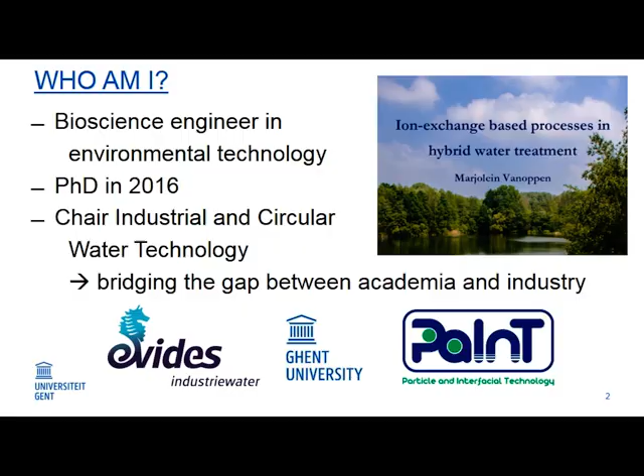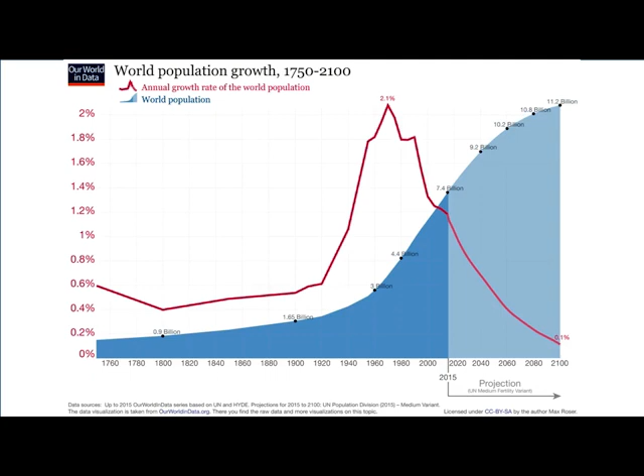The thing is, with increasing populations, we will need a lot more water. By 2050, the world population will have increased to, this is a projection of course, around 9 billion people. Fortunately, the incredible growth rate has dropped quite a bit by then, but still this is a lot of people to provide drinking water for and also to provide food for. Because this means that by then we'll need 70% more food.

Now this might seem a bit weird because it's not 70% more people, but all of these people want to live to the standard that we live in. We in the Western world have a very high living standard that has not been attained yet in developing countries in Africa, Asia, Latin America, and so on. But all of these people's living standards are increasing, and that's of course a good thing, but it also means that they will need more food, and we will need more water to produce all that food.

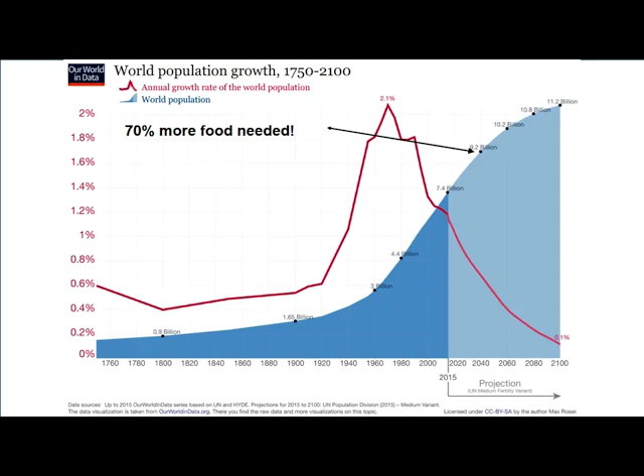Now, why do we need so much water for all that food? Well, 70% of all the water that we use goes to agriculture, goes to growing crops and raising cattle and so on to provide for our food. Funny thing is, for all of this, we need fresh water. You can't use salt water.

But only 2.5% of all the water on our planet is fresh water. And of that 2.5%, only 0.5% is readily available for use. All of the rest is frozen at the poles, for example. So all of the water that we use has to come from this meager 0.5%. Or we can look at the 97 other percent, which is seawater.

The vast amount of water contained in our oceans, our seas, is a very interesting source for drinking water in the future. Now, a lot of countries have already started using seawater as a source for drinking water. In the Middle East, for example, where they are not as fortunate as us to have vast reserves of groundwater or river water for freshwater supply, they've been desalinating seawater for many, many decades.

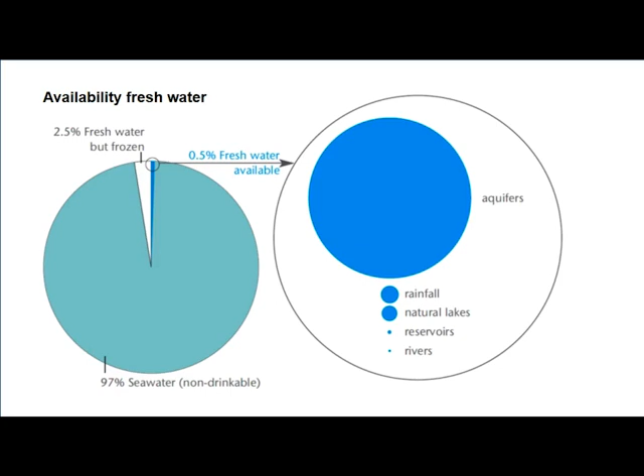So for seawater, we'll need reverse osmosis, which is the strictest membrane technology that we have at the moment. Reverse osmosis will retain more than 99% of all salts that are present in your water, and will only allow the water to pass. That's very nice, of course, but it comes with a great downside. Reverse osmosis, as the name says in itself, is the reverse process of a natural occurring process.

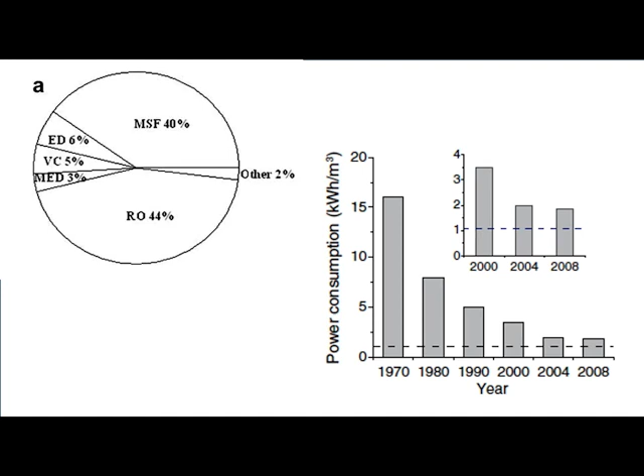The last figure is just to show that there are also other processes used to produce drinking water from seawater, but they are more and more getting replaced with reverse osmosis because these all ask for a lot more energy, factor 2 to 5 more than reverse osmosis. So this number has increased a lot over the last few years and is still increasing.

To tackle the issue of this energy limit, we started thinking, how can we go below this 1.1? And the reason we want to do that is to make this technology available for countries where it's needed, but that don't have the resources to invest this much energy in seawater desalination. Countries like the Middle East that I was talking about have no issue with this. They don't have groundwater, but they do have plenty of oil, so energy is not a problem. Other countries, such as African countries, India, they do need this, and seawater desalination would help them a lot in their freshwater provision, but they don't have the energy that's needed for this.

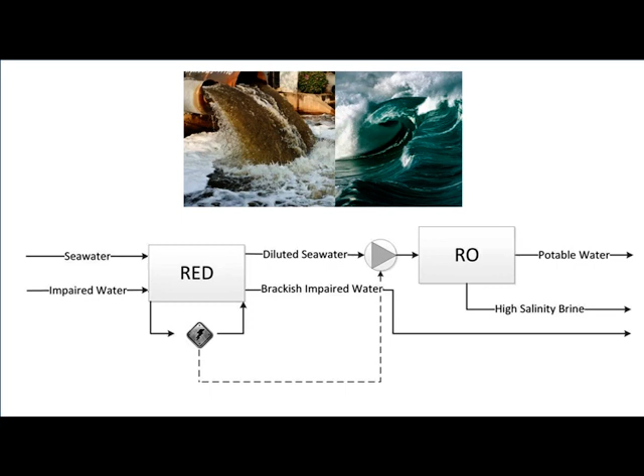So, as the title of my PhD already said, we looked at hybrid processes. And there is a very interesting technology that's been developed in the Netherlands a few years back that's called reverse electrodialysis. I'll explain in a bit what that technology does, but in a nutshell, reverse electrodialysis is capable of producing energy from seawater. By contacting seawater with a freshwater source through a different type of membrane, you can use this difference in salinity, or this difference in osmotic pressure, to produce energy. Now if you couple that with reverse osmosis, you can get a system that's much more energy efficient, and that's the system I want to talk to you about today.

Shortly on how reverse electrodialysis works. As I said, they work also with membranes, but a different type. In reverse osmosis and the other membrane processes I showed you before, water is the preferred solute to pass through the membrane. These types of membranes work the other way around. They don't allow water to pass, they allow ions to pass. They are very dense membranes, but they have a very high charge, which means they attract ions and allow them to pass through to the other side of the membrane. You have two types, of course. You have negative and positive ions, so you also have anion exchange membranes and cation exchange membranes.

Now the interesting thing here is if you have seawater, and you have, for example, river water, but any freshwater source will do, and you contact those with these membranes, the same equilibrium that nature strives to will occur here, and the ions will move from the seawater to the low salinity side on their own. That's a natural process. This means if you have a lot of these, usually a few hundreds of these cell pairs as we call them, all of the negative ions will move to one side and all of the positive ions to the other side, creating a potential difference because you have a negative potential on one side, positive potential on the other.

Through reduction oxidation processes at electrodes that you place on both ends of these membranes, you can transform that ion flow to an electron flow. That is then basically electricity. And that is in a nutshell how you can produce energy from seawater.

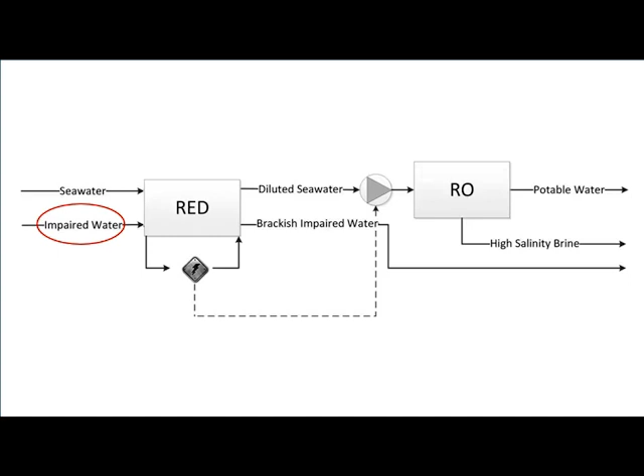So again, now I hope you understand a bit more why we want to combine these two. It has a lot of advantages. If we use impaired water, as we call it, which in theory could be wastewater without any treatment, but we're currently looking at the effluent of the wastewater treatment plant, with the seawater in reverse electrodialysis, you'll produce energy. That energy you can use in your reverse osmosis process to produce then the potable water.

But an even bigger advantage is that here, part of the salt from your seawater will already have transported to the wastewater, decreasing the salinity of your seawater and decreasing its osmotic pressure, thus decreasing the energy that's needed to desalinate it in the reverse osmosis process. So combining these two technologies has a double advantage. You produce the sustainable energy needed for the desalination, and you decrease the energy that's needed for the RO process itself.

Another advantage that I won't go into detail here, but it's very interesting for oceans as well, is that you always have a brine from RO because you have that double concentrated seawater. But if you lower the salinity here already, this salinity will also be lower, and you'll have a lower impact discharge. Same goes for the impaired water.

A lot of big cities are at the coast and discharge their treated wastewater into the sea, causing a big concentration gradient in the seawater, causing ecological issues. By combining these two, your concentration that you're discharging will be much closer to natural concentrations in the seawater, thus causing much less ecological issues.

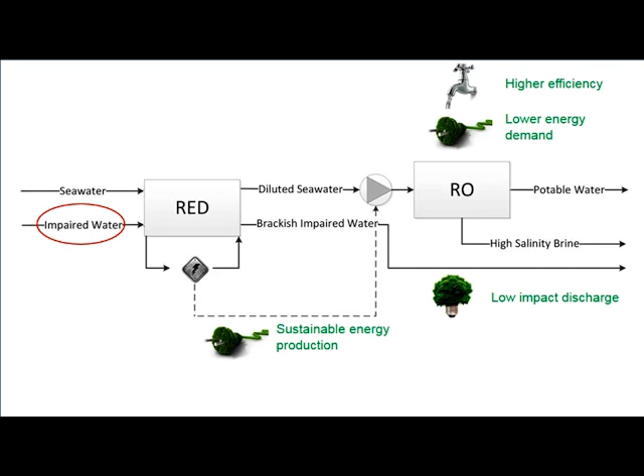Now we did some modeling to take a look at what the actual energy demand would be of such a process. And of course we looked at the best case scenario first. What if everything works perfect? And that's called thermodynamics. And that gives us kind of a goal that we want to work to. It's the same as with the 1.1 kilowatt hours per cubic meter for RO. That's our ultimate goal, and you see that over the years we've almost attained that, or we're getting very close. So we wanted to do the same for the RED-RO process.

And here you can see the RED recovery. If you go to 1, that means that you have removed the maximum amount of salt from seawater that you can in the process, which in this case is half, because then you reach the natural equilibrium, the same concentration on both sides of your membrane. And here you can see the RO recovery. So how much water do I produce? So now we're usually at 50%. If you put in 1 cubic meter, you produce 500 liters.

What we found is that as long as your RED recovery is high enough, your overall system can be energy neutral or even energy producing in an ideal thermodynamic world. With this process, you can actually strive to a process that is both capable of producing potable water, but at the same time also produces sustainable energy. Now we'll already be very happy if we can attain the 0, but this is a very good driver for further development of this process. But the main goal is, of course, energy efficient production of fresh water.

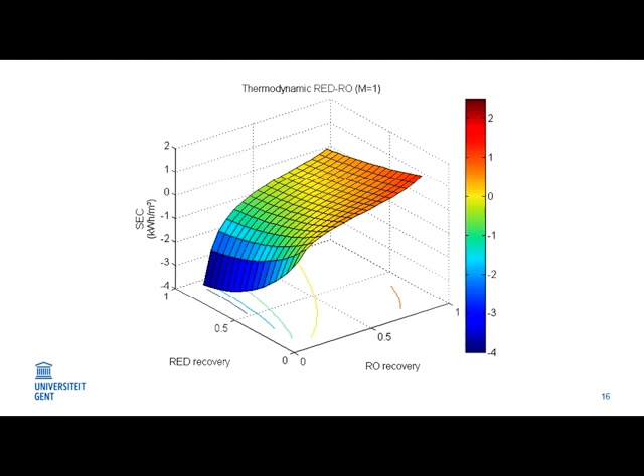Now we did the same, and then we included some of the losses. We looked at current state-of-the-art membranes, current state-of-the-art electrodes and systems, and then we redid our calculations to get a more realistic idea of what the energy demand would be.

And here you can see, so the same here. This is the RED recovery, so how much salt you already remove in your RED system. And this is the specific energy consumption. So the dark blue bars are the same as the figure before, what happens in an ideal world. And then the lighter blue ones are a more realistic estimate, what happens if we include losses and non-idealities of our system. And you can see if we only remove 25% of the potential in RED, we are around 1.1.

So that's the thermodynamic limit for RO. We can achieve that by a small desalination with RED. But of course we can go further, and then we can achieve about half a kilowatt hour per cubic meter of produced fresh water. So that's a very significant reduction of the energy demand that's currently needed for reverse osmosis processes, and also a very significant reduction below the thermodynamic limits for desalination, just by combining these two processes.

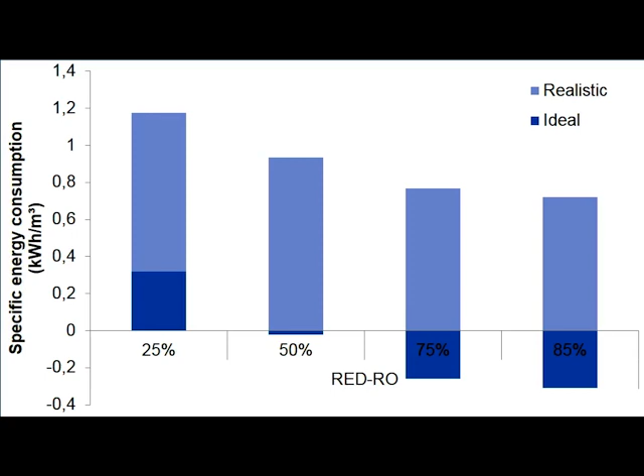This is where I kind of ended my story yesterday, but today is a more scientific presentation, so I'm going to tell you about some of the downsides and how we're tackling those as well today. One of the biggest issues at this moment is that for RED, the natural desalination process, so this natural diffusion of your ions from the seawater to the wastewater, is rather slow. This means that if you want to treat a lot of water, you'll need a lot of membrane area, and these membranes are not cheap.

This is an upcoming technology. These membranes are used in other processes as well, but these are all still very much in a developmental stage, and not like RO membranes that are being produced by hundreds of manufacturers. So these are still very expensive, which means that for RED you have a very high investment cost.

I'm not going to explain this, but here you can see in relation to other processes that we might look at for this hybrid process, in RED you need the most membrane area, and it is by far the most membrane area. So that's an important challenge to overcome. So we looked at how we can balance out the investment cost versus still having this interesting energy efficient process.

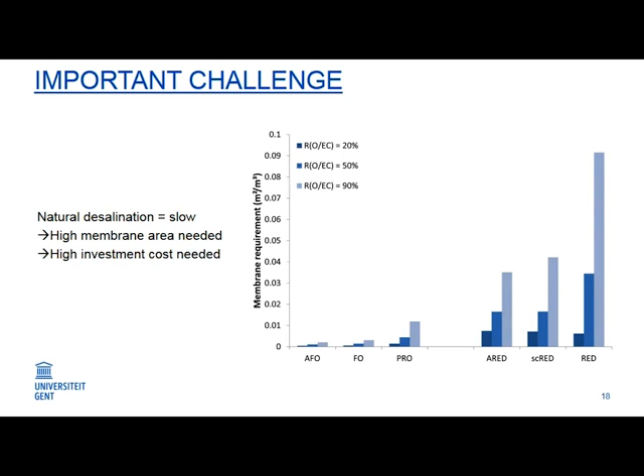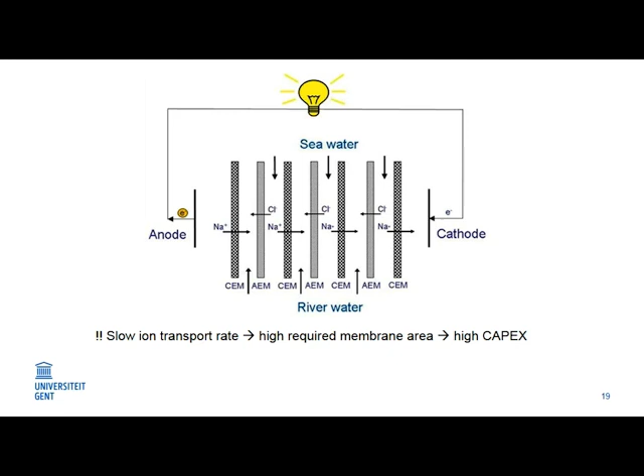So as I said, in RED you have slow ion transport, you have a high required membrane area, so a high investment cost. So we thought, can't we push the ions to move faster? How can we make this desalination process go faster just by giving the ions a little push? And that's how we came up with assisted RED. So we are aiding the ions to move a little bit by adding a bit of energy to the process.

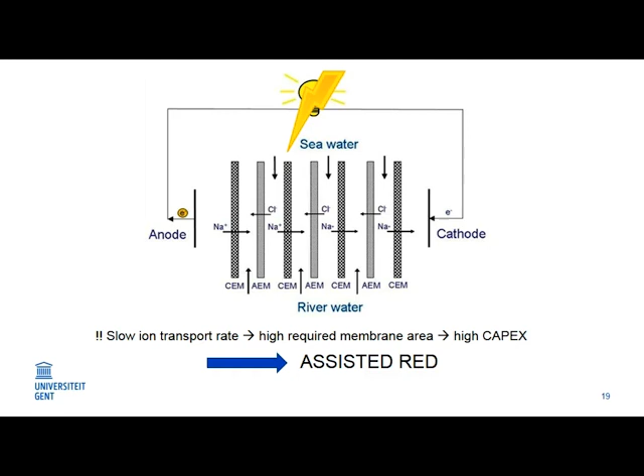So not enough to have the ion transport be, no, let me rephrase that. The electricity we're putting in here is still lower than the electricity that would be produced by RED, but we're just giving the ions a push and making them move faster, especially in the beginning stages of the process. And that's something that I'll explain in a minute. So we did the same modeling for assisted RED.

So if you look at RO, you have the 2 to 4. For RED, in theory, it can be energy producing, but in reality, it's very significant energy savings, as you can see here. And then if you look at the assisted RED RO system, you don't get energy production. You actually put in a slight amount of energy, but you still achieve significant energy savings, and you can still achieve this 1.1 kilowatt hour per cubic meter thermodynamic limit. So although you're putting in a tiny amount of energy, you're still having an overall much more energy efficient process. I know you're all thinking now, this doesn't make sense, but it'll make sense in a minute.

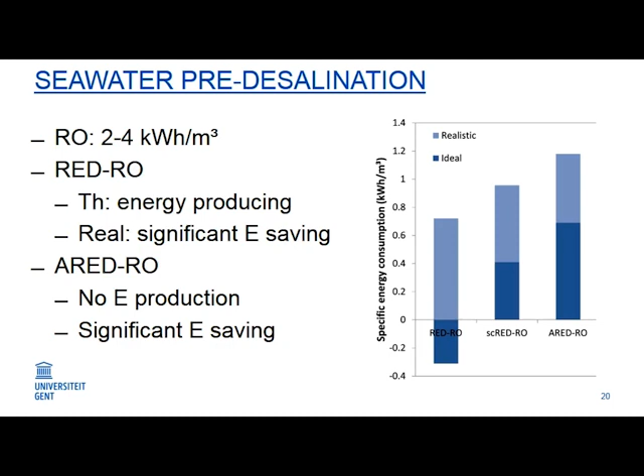We started looking into this assisted RED and looking into what happens to the ions if you do this in your system, because it has been done before, but in another process called electrodialysis, where you desalinate your water using electricity. So you put in a lot of energy to move all the ions out.

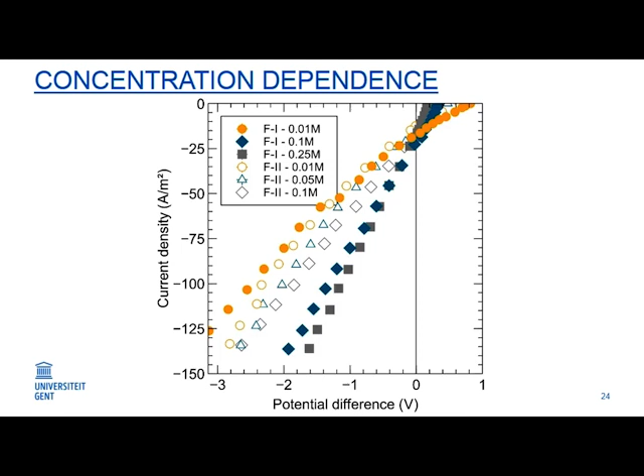And that's how we came to the final process that we are investigating now, and we believe could be the optimal process for this hybrid process that we are investigating, which is use assisted RED to just overcome this initial resistance, because if you overcome the initial resistance, your desalination will go much faster, the rate of ion transport will be much faster, and your membrane area that you require will drop rapidly.

Once you've done that, you can transfer to RED, which will compensate for any energy that you needed here, but which will dilute your seawater that you can then send to reverse osmosis for freshwater production. And this is the process that we are looking into now. So it has, again, all benefits from the systems that we investigate.

Now this looks like 2 different processes, so it looks like overcomplicating the system, but it doesn't have to be. They are exactly the same. You need 2 electrodes, you need the membranes in between, you just need to tune the working of your electrodes. In the beginning of your process, they need to put in a bit of energy. While you go further in your process, they need to get out any energy that you can produce. So in practice, this is just one setup. It's just the mode of operation that changes during the process.

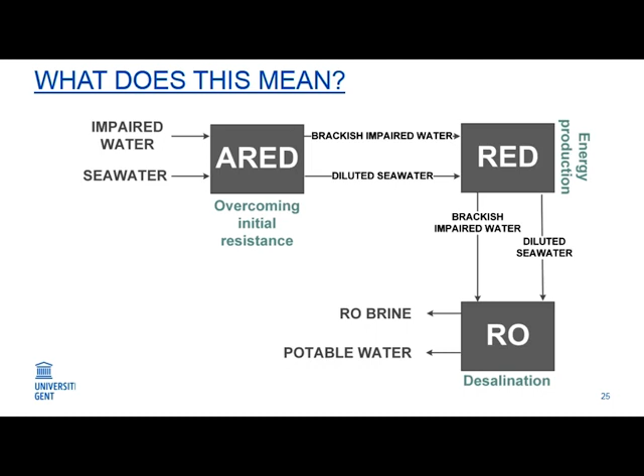This is where I ended my PhD. And now, fortunately, we are working further on that. So this is a Horizon 2020 European project for which we have gathered a lot of collaborators all over Europe, amongst which, very interestingly, Wetsus, where the original reverse electrodialysis was developed. It's called REvivED water, and we are looking at low-energy solutions for drinking water production.

It's called Revival of Electrodialysis Systems, because we're not only looking at RED, but also assisted RED and ED, maybe even electrodialysis to replace reverse osmosis, so you can integrate everything into one single system. The project has been going on now for about a year, and the ultimate goal is to build a pilot scale setup and test that in countries where these kinds of technologies are needed. We're currently finishing up the preliminary lab experiments and starting with the building of the prototype.